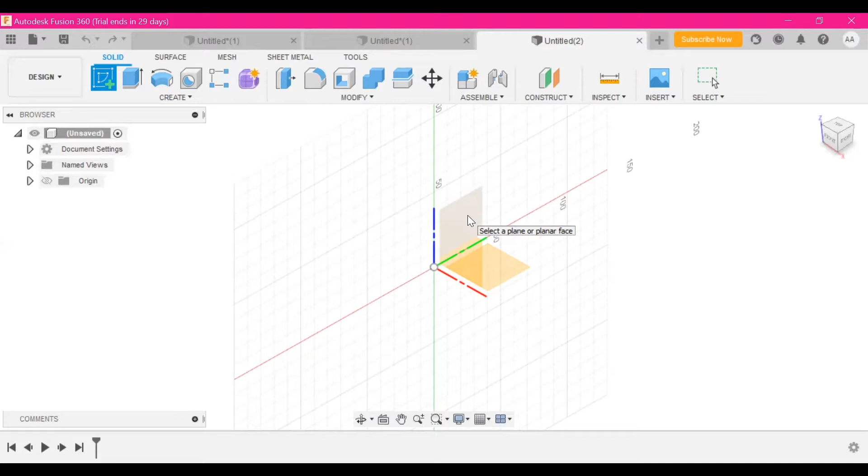Now you will see three orange rectangular boxes. These are actually planes. So if you can remember back to geometry, you usually do things in the XY plane. There's also a YZ and an XZ plane. So for today's purposes, we will be using this plane. But if you are constructing something on top of something or need to cut something in the middle, constructing and using other planes is important.

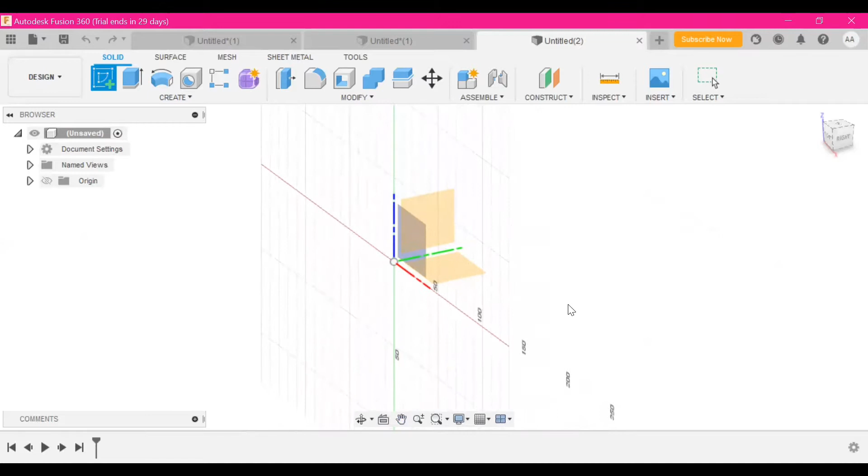So I'm going to click this bottom plane, and before I do that, this is how we can move and see our model. If you are using a mouse, you can click the control button and scroll to move around. And if you actually want to do a 360 view of the object, you can click shift and control on the mouse and move it that way.

So let's click on that plane. It's going to bring us to this.

So this is the main sketch feature, and you can see it highlighted here, where we'll be spending most of our time today. So we need to think about drawing two circles from the origin, which is right here, and these are going to be the measurements of our bottle.

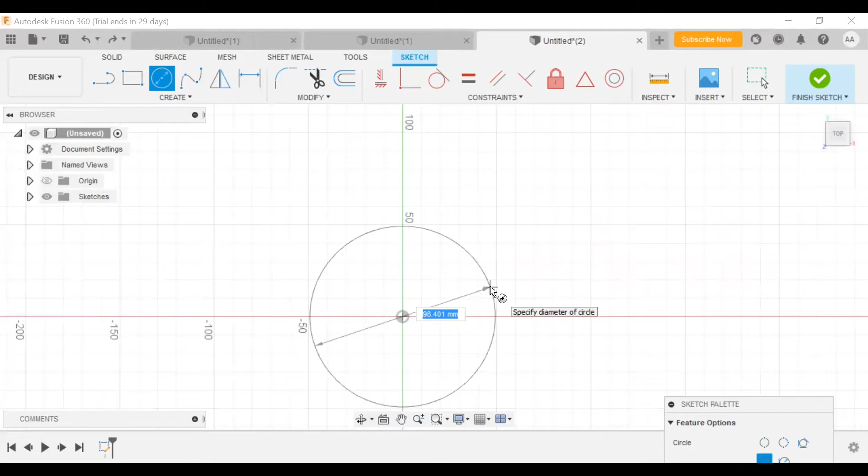So I'm going to click on center diameter circle, highlight, and hover over the origin. It will automatically hover over one to click for you, which is nice. My bottle was about 32 millimeters in diameter, and I'm going to add 5 millimeters to that for tolerance. So my total will be 37 millimeters.

And I want the thickness of this device to be about 11 millimeters. So I'm going to make the diameter of this circle 48 millimeters.

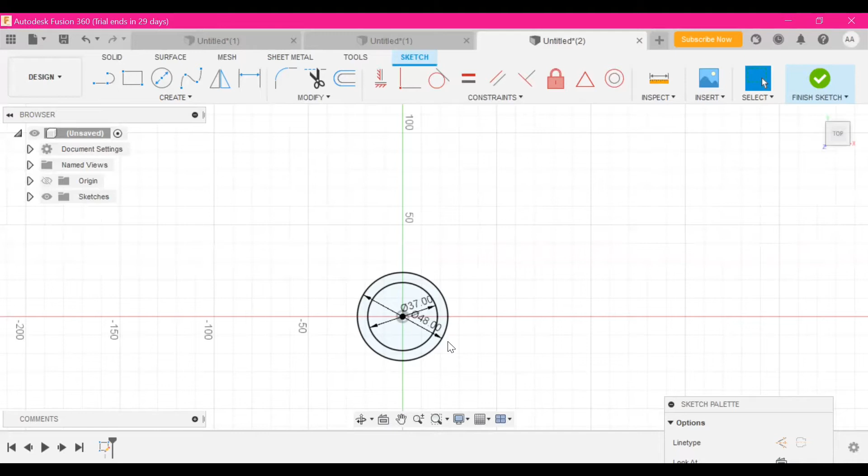Next, we are going to use the line tool to create two lines in a triangular shape from the origin to the outer circle. I'm going to zoom in here and use this line from the origin to the outer circle, from the origin to the outer circle. These don't have to be exact because we are going to be creating another construction line.

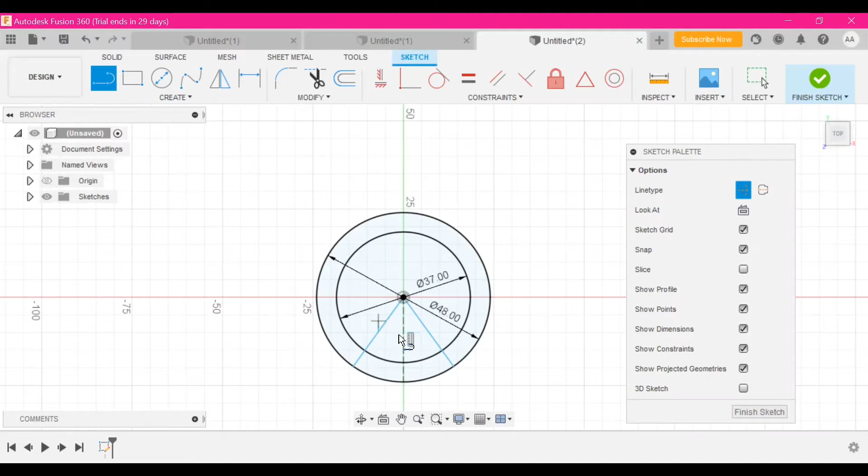So I'm going to bring up my sketch palette if you didn't have yours up there and click on construction. So I'm going to create this line right in the middle on top of this green line that we see. This construction line is basically an invisible line where we can reference different sketches and different points from. So we are going to reference these lines to the construction line to a certain degree.

So to do that, we're going to click on the sketch dimension and select both of those lines and input our value. So let's say I want it to be 30 degrees, and do the same thing on the other side and type in 30.

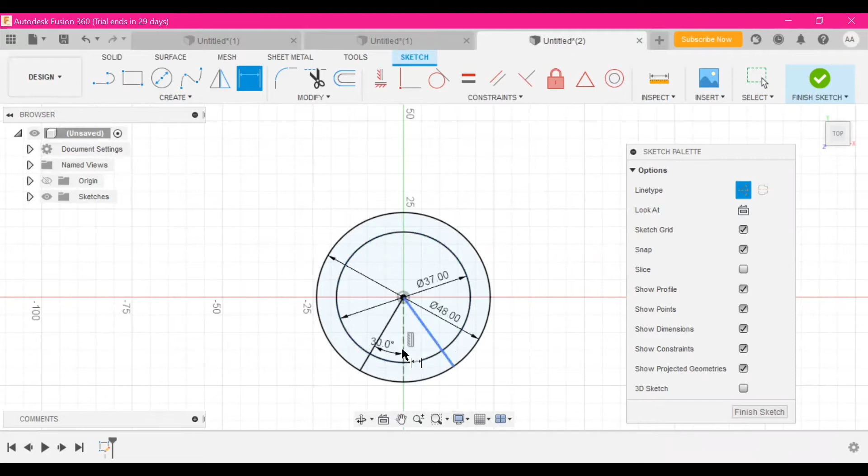The next step, we're just going to zoom in here and use this trim tool and just trim the inside, because basically our handles are going to come off here, so we don't need anything inside of the circle. So that is complete.

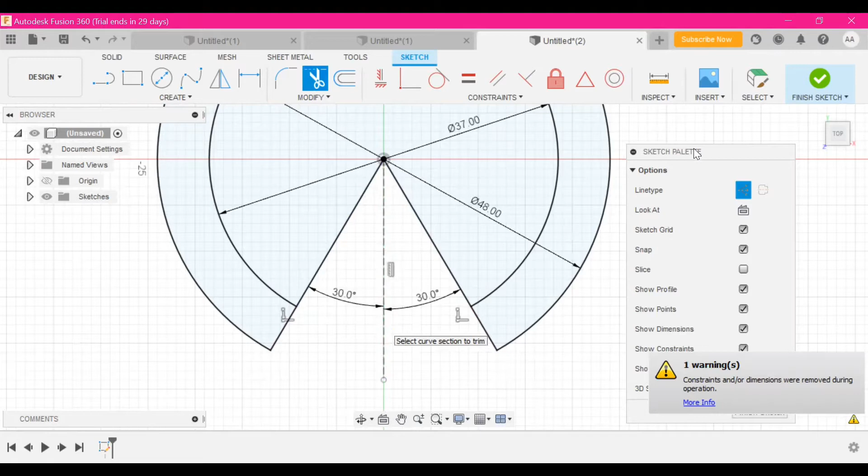The next step is we are going to create these teeth that are going to help us grip the bottle cap and open the bottle.

So to do that, we are going to click on this drop-down menu and add a point to the end of the inner circle. Now we want these points to go all the way around here. Instead of doing that manually, let's do it the easy way and use this circular pattern. And it will come up with a pop-up menu. These pop-up menus are pretty helpful because they kind of tell you what to click on, what you need.

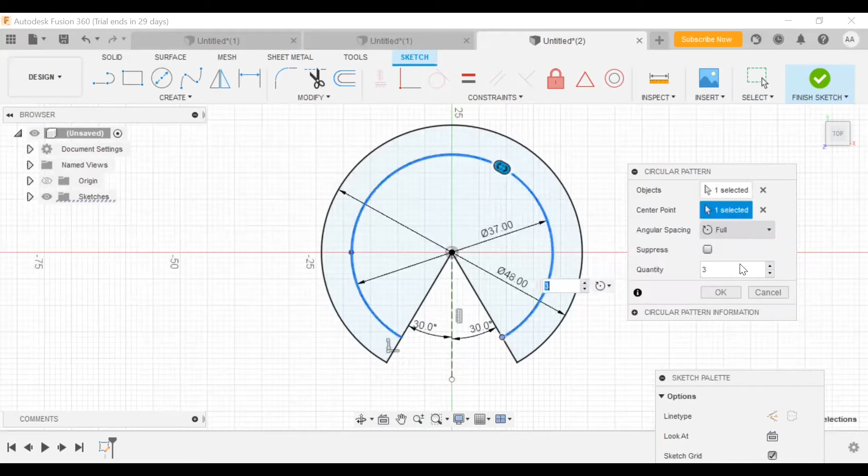So an object, that is going to be our point. Our center point is going to be our inner circle. And our angular spacing is angle, and it is 300 degrees. So I found that out because 360 minus this 30 and this 30. For quantity, I'm thinking I want 61 little circles because half of 61 is how many teeth I want in the middle of my bottle cap opener. Click OK, and now we see all of these little dots around it.

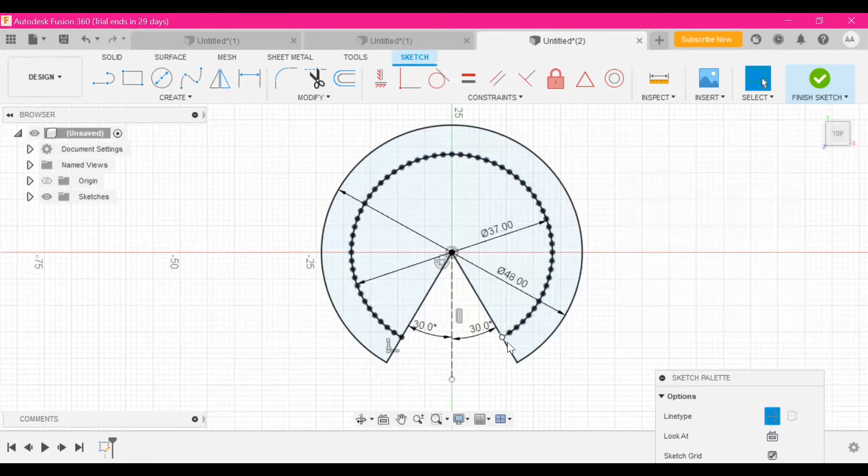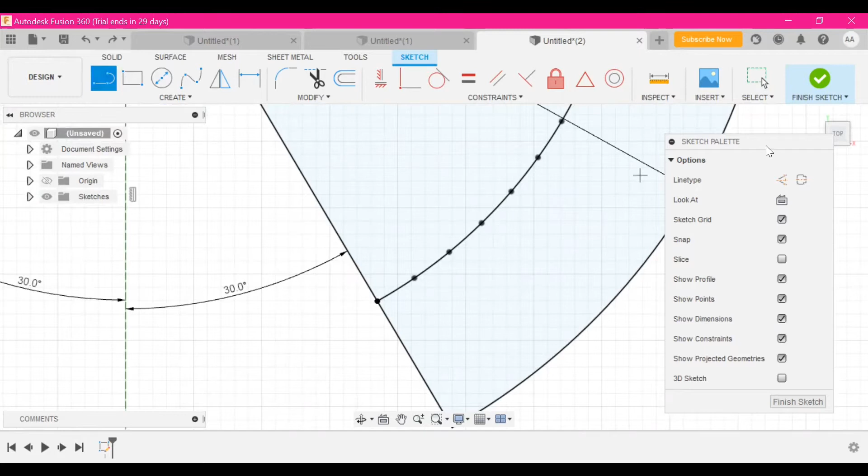So next we want to create this tooth triangle shape down here and all the way around the inner circle. To do that, I'm going to select this line option and make sure your construction line is unclicked, and create a triangle. It doesn't have to be perfect because we're going to be using this equal tool to make the lines equal.

Now after this, if we want the triangle to be a specific dimension or angle, which we do, I'm going to set mine to 70, and we use the sketch dimension tool to make these 70-degree angles as well.

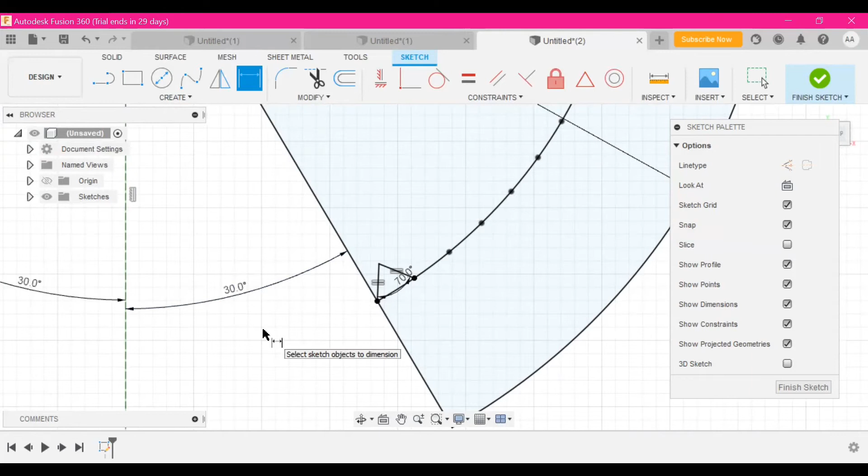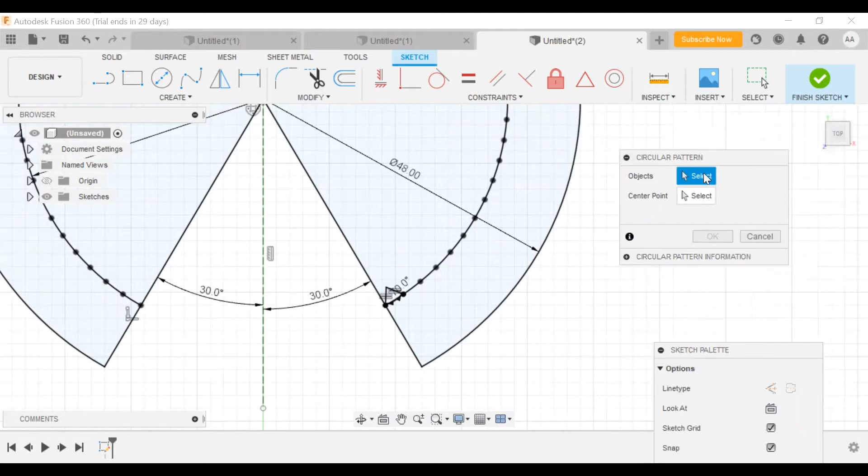Once we have this completed, we are going to zoom out and click on this drop-down menu, circular pattern, to create these triangles along all of these points because we don't want to do that ourselves. So again, this handy dandy little box that has popped up, objects, we are going to click on the triangle lines. The center point is going to be, again, the inner circle.

We want to change this to angle. This is going to be the same degree as before. And our quantity will be 61.

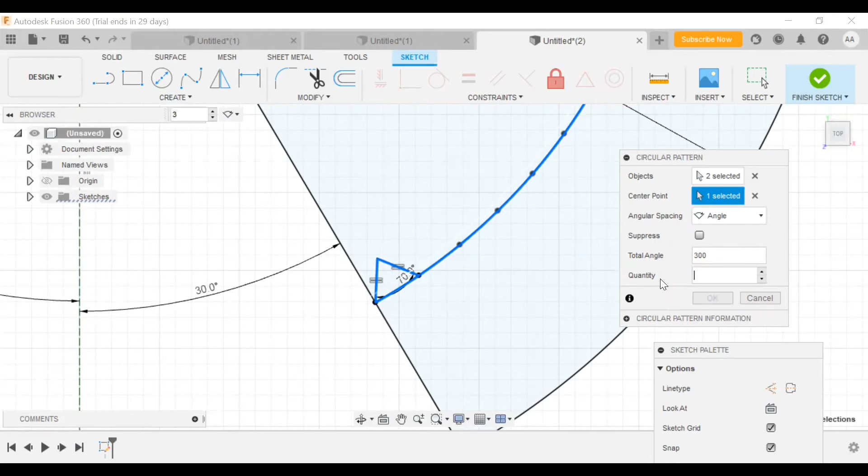So let me zoom out. Now we see all of the little teeth have formed. And with these extra pieces at the end, we can use the trim tool to trim it off.

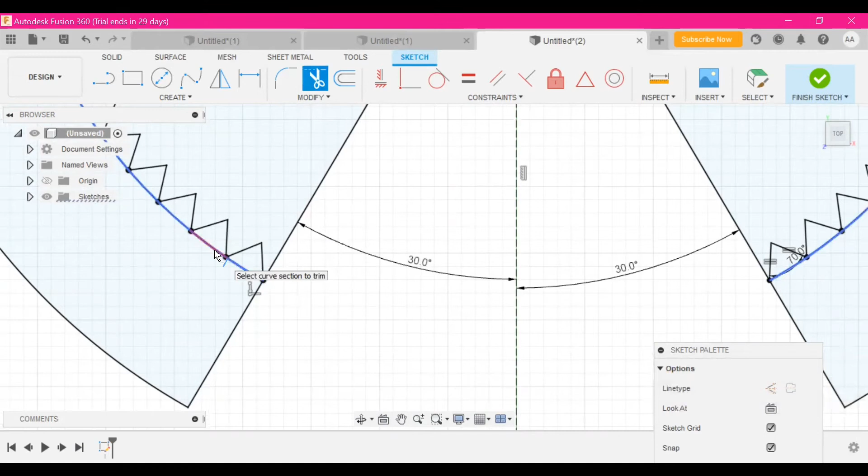And we want to delete this inner circle because we don't really need it anymore. So we can right click and click delete. Oops, right click, delete, and it will delete that inner circle.

So now we have the top part of our bottle opener complete.

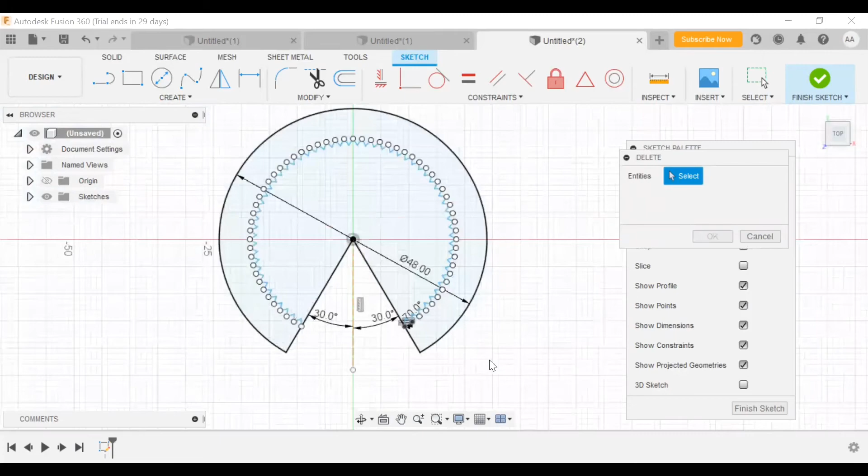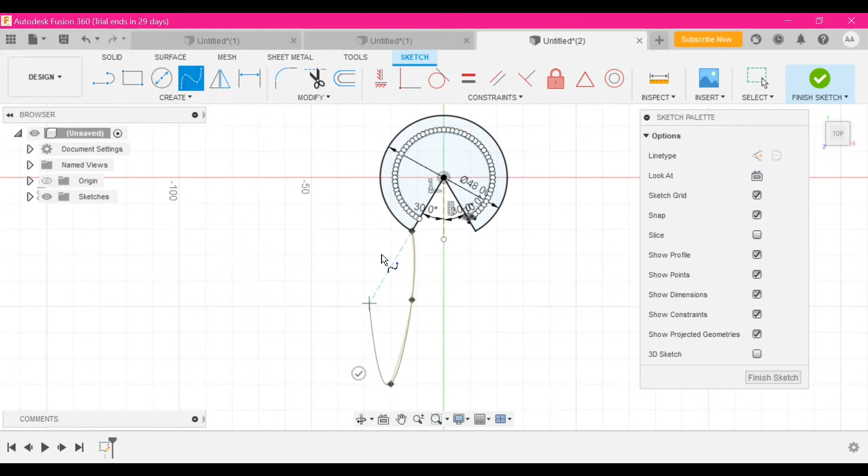The next step is to create the handles of our bottle opener. So I'm going to zoom out, and how we are going to create that is use the spline tool and create some dots around the bottle opener. Click on this green check.

To get out of this tool, you can right click and click OK. And now we can really move this design and move the points, click on the point, and customize how we would like it to look.

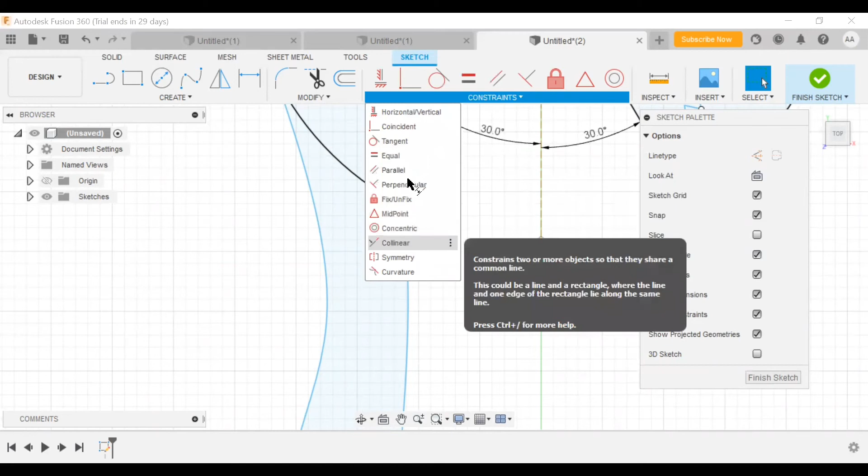So once you got a pretty good rough draft, I want to create a seamless flow between this line and our handle. So how I'm going to do that is I'm going to click on this drop-down menu and click on Collinear. I'm going to select these points, and now it has made them into a seamless line.

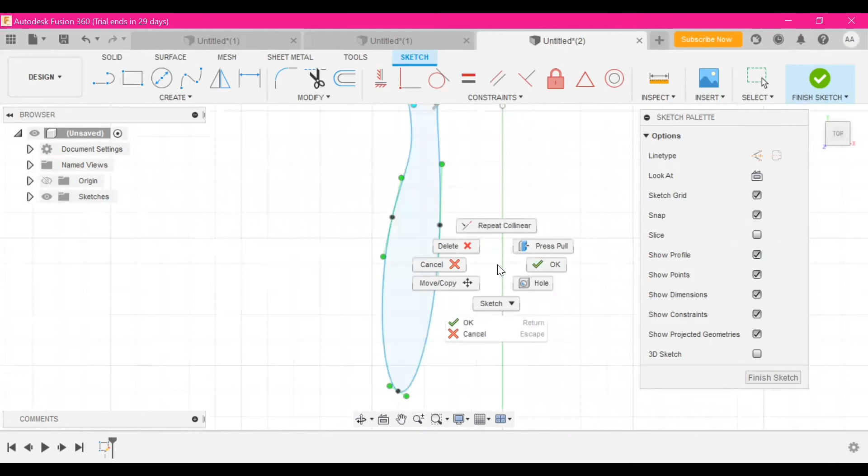This may change the design of your handle, what we just created before, but no problem, because one way to adjust is, again, clicking on those components, moving them around, and creating just the right handle, that is both comfortable for your clients as well as it looks pretty good.

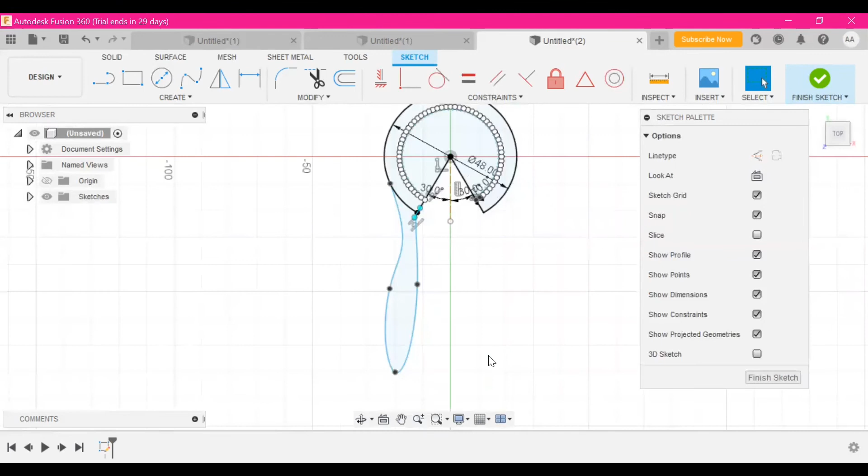So now that you have a good final draft of the handle for your bottle opener, we want to create it on this side. So how do we do that without trying to replicate it?

We're going to use this drop-down menu, click on mirror, and then we are going to use this handy dandy box, select our objects we want to mirror and our mirror line, which we are going to use the construction line that we built in the beginning.

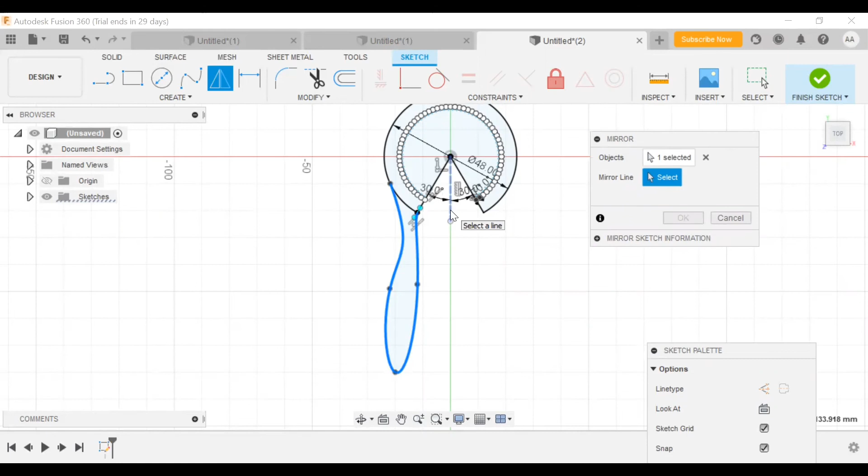And now you have a perfectly mirrored image and your bottle opener is complete. We can click on finish sketch.

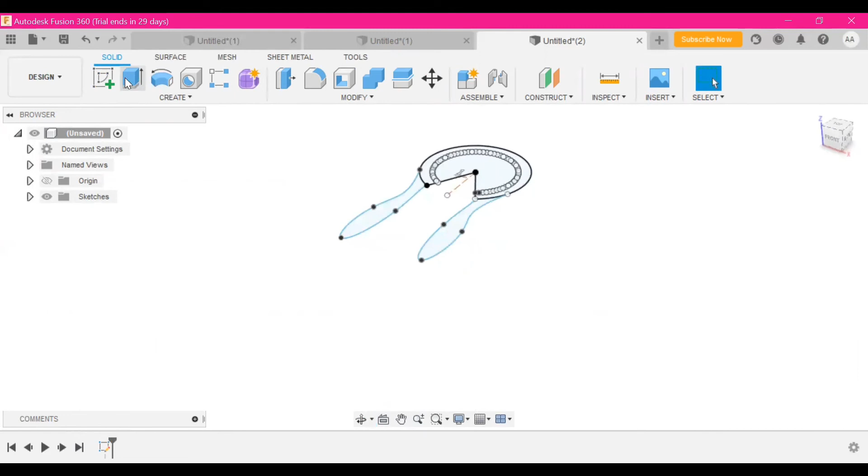So after our sketch is complete, we are going to want to create a body or an object. To do that is to extrude our sketch. So type of extrude is selected. What profiles do we want to extrude? So we want to extrude the handles and the upper bottle opener part.

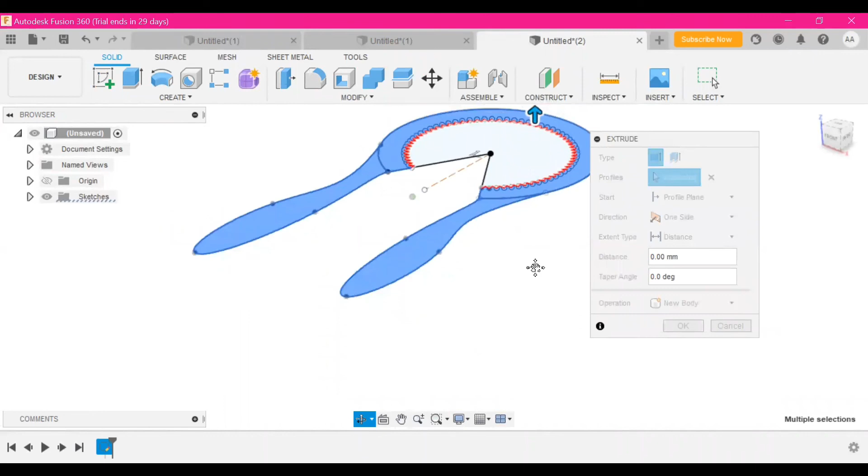And once you click that, you are going to notice an arrow, and really this arrow allows you to extrude. You can just drag it up. You can also extrude downwards. We're going to extrude up. And you can build your measurement that way.

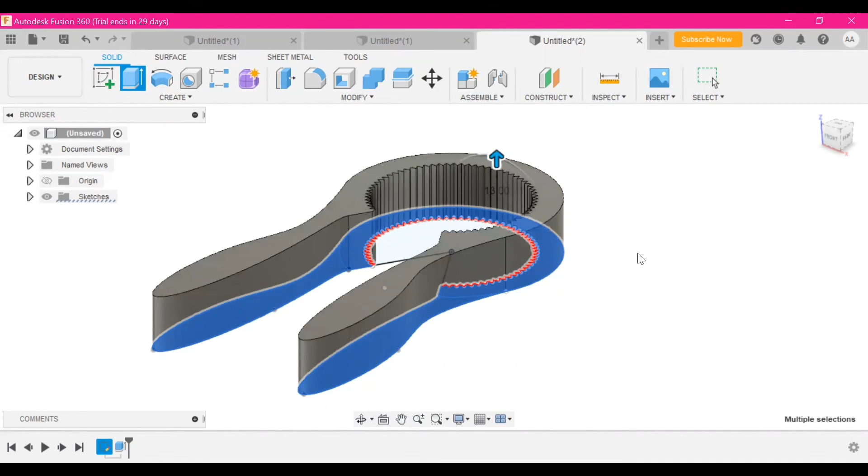I like to type in a distance if you have a specific measurement, which you can use 13 millimeters. You click enter. And now really our bottle opener is complete.

The only thing we need to do is export as an STL. So we can click on File, 3D print the body that we would like to export as an STL.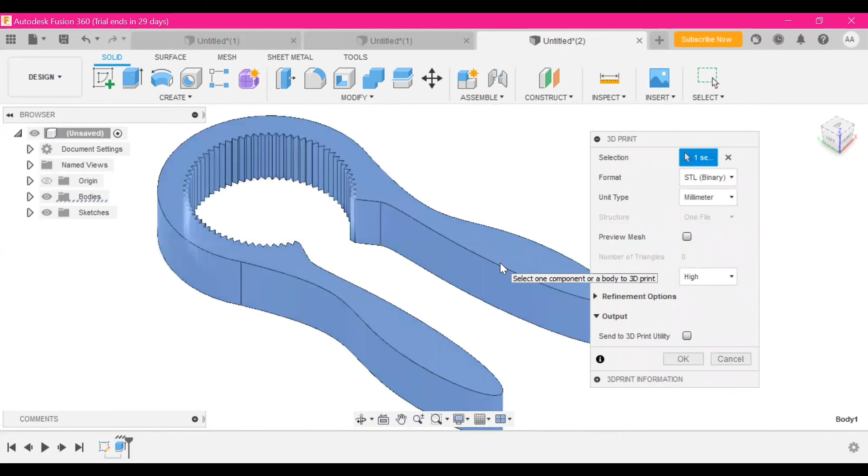Select the format. We want it to be STL. You can select different units and make sure the Send to 3D Print utility is clicked off. Click OK, and then you want to save it as an STL file on your computer.